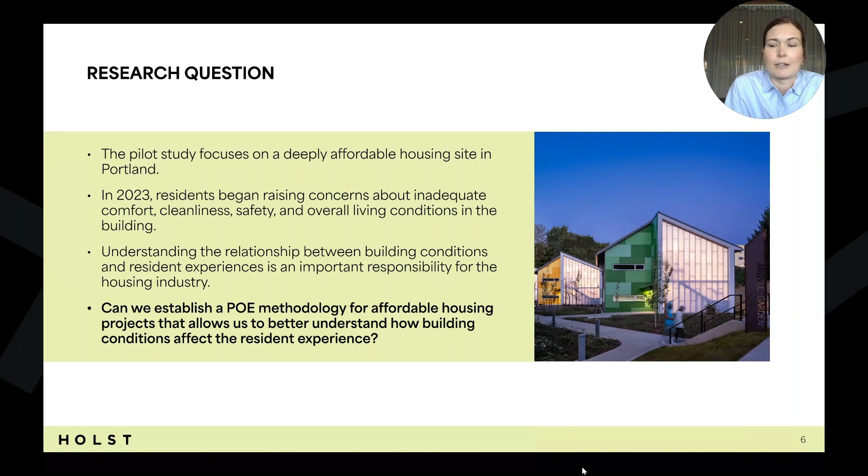Through this research design, we were able to take away key methods that could be scalable for future POEs and studies at other housing sites. Corey's going to talk a bit about the site that we studied.

The building overview: it's owned and operated by Transition Projects, which is a housing authority that is really trying to bring people up out of homelessness. A lot of their mission is geared around that, although they don't have very many properties that they operate — most of their programs are more administrative. Originally this was called LISA, the Low Income Single Adult Housing, because there's not really any family units in it. It's all single room occupant dwelling or sleeping units, and a number of studios, and there's one bedroom on site.

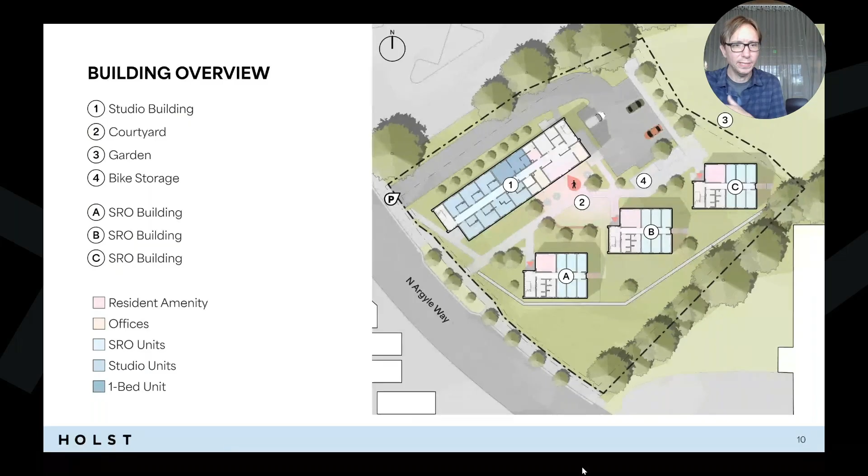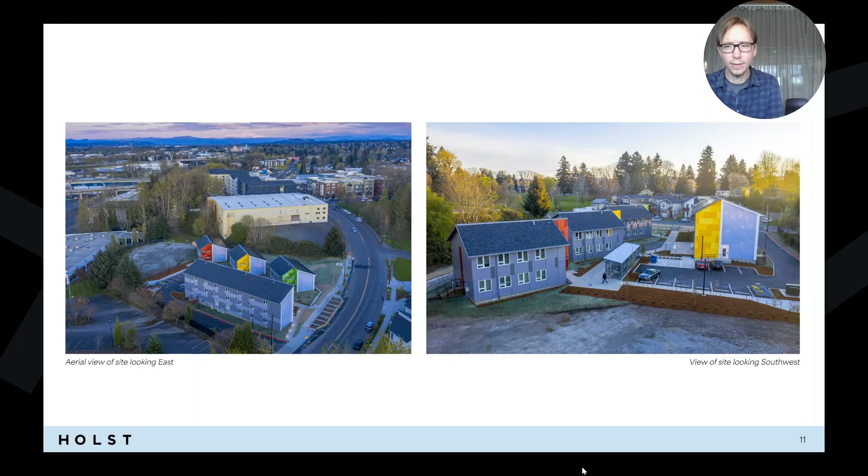Here you can see some photographs, one on the left looking towards the downtown Kenton area, and the one on the right from the back looking towards the street and Kenton Park. You can see here on the right the parking, which is rather limited, and Maggie will discuss some issues with that in a bit.

Diving a little closer in, looking more closely at the buildings, this is the plan of the studio building, and on the bottom is the ground floor plan. The pink is common spaces, like a community room and community kitchen. Items 3 and 4 are laundry spaces and a resident pantry. This is permanent supportive housing, so they have some materials and supplies available for residents should they need them. The blue is all the studios and the 1 bedrooms.

I've added an indication of how the building was constructed. It's modularly constructed, and the way it lays out for this building is shown here, where there are 4 modules per floor, 3 floors overall, and then the stairways and corridors were constructed on site between the modules once those are set in place.

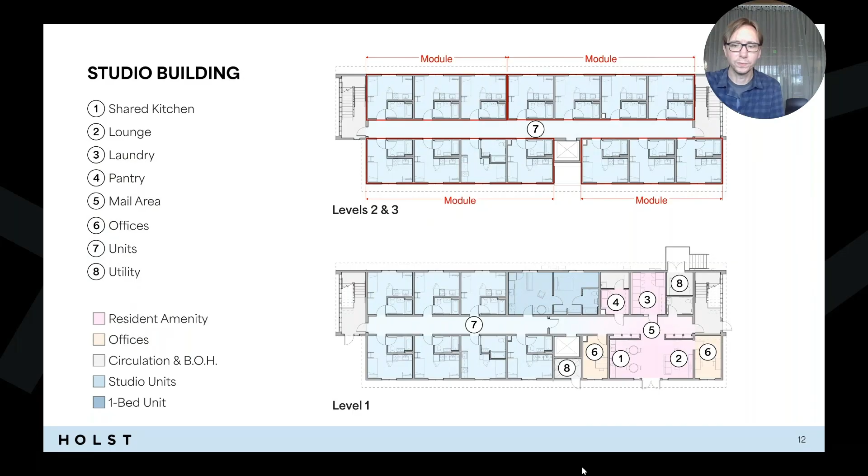These SRO buildings, of which there are 3, are all identical, and each one is 2 floors tall, with identical floors. Each floor has 6 SROs, 1 shared kitchen, and a pair of shared bathrooms.

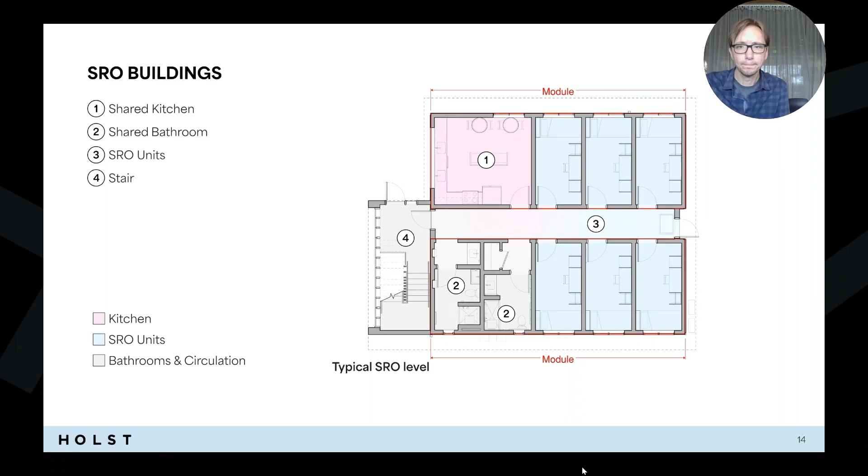Great, all right, so a bit about our research design and methods. Our overall process is outlined here. We like to think of it as 5 steps, and the first is planning.

For this case study, it was a bit unique because we identified the project we were hoping to study for this particular grant. Ideally, it's a partnership and a joint decision between the developer, building owner, and the architect or the group doing the POE. This helps identify clear goals or objectives for the study to narrow the research design focus.

The second phase is data collection. Since we had the site established, we established some criteria around what type of data we wanted to collect. We used a mixed methods approach for this, which is a mix between qualitative data and quantitative data.

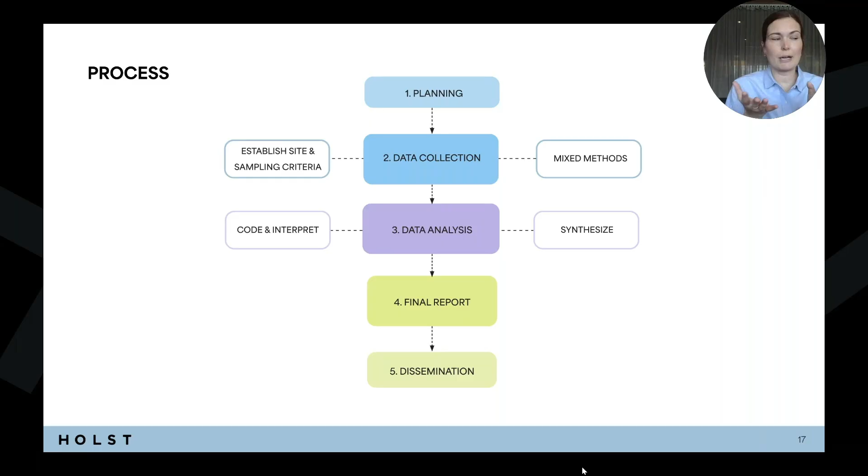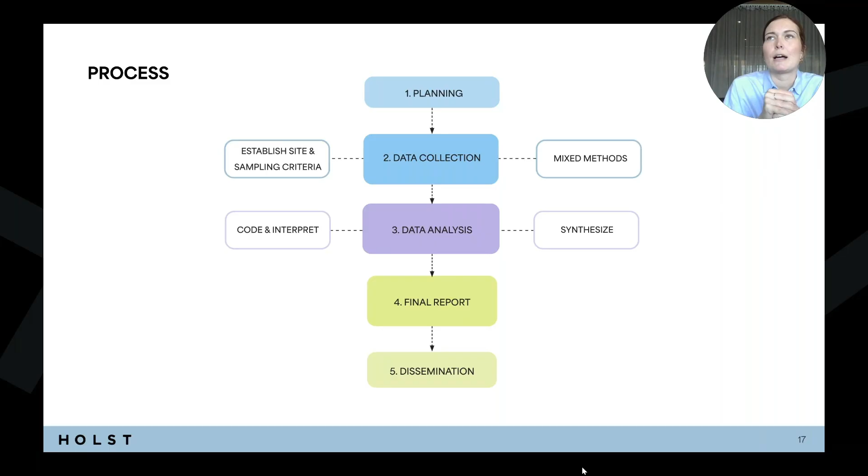We should also note that Holst was the architect of record for this project, although Corey and myself did not personally work on the project. It's important to be transparent with all of our findings, whether they're negative or positive. That is how we learn from POEs.

All right, so we kicked off the study with a building operator workshop, and this is what we recommend to be the first step for any POE. It's a way to meet with the resident services coordinators or the on-site staff, and ideally the property management team, to understand their perspective of the building and provide an overview and perhaps a glimpse into some areas specifically that we should study.

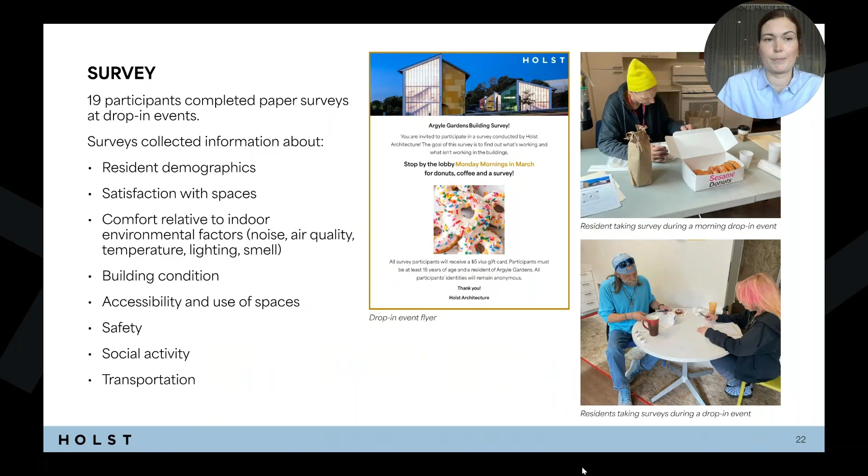The focus group was conducted after the surveys, and we find it's best to conduct the events in this order because a focus group can help elaborate on some of the key themes that we found in the survey responses, but also explain different anomalies in the data that we found.

This took place at the end of the summer. We hosted a barbecue, and we opened it up for all residents, whether they opted to participate in the focus group or not. Advice we received from our resident services staff is that when you're coming into people's homes and taking up their time, you want to make sure you're rewarding them and acknowledging that you're taking up their time and coming into their space. That's why we thought it was important to offer a barbecue for everyone, whether they sat in on the focus group following the barbecue or not.

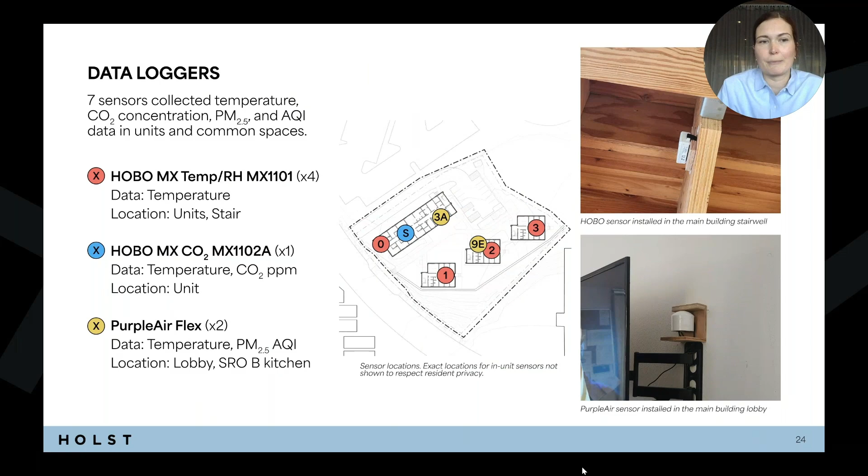We also did energy use modeling using the monthly electrical and natural gas bills. We were able to model some other scenarios to test different heating, cooling, and ventilation strategies.

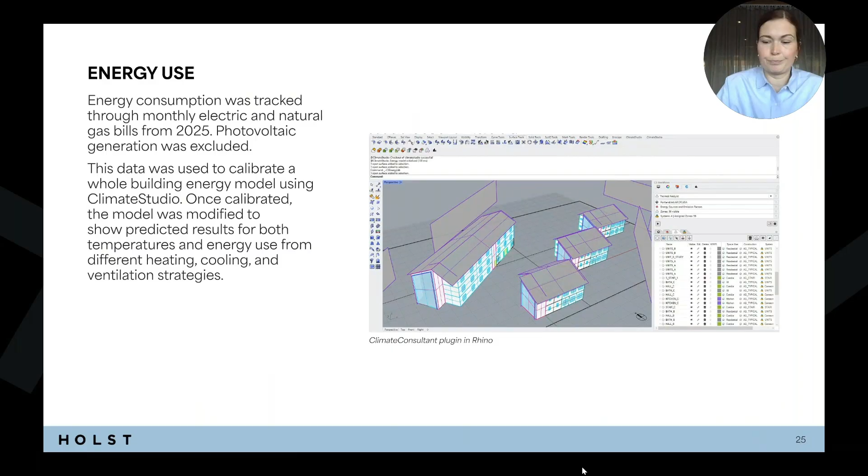For the analysis portion, in the building operator workshop, we always walk away from our conversations with resident services staff surprised, but also pleased with how invested they are in the overall health and well-being of the residents.

There's frustration about the amount of time it took for maintenance concerns to be addressed, and also some structural issues that residents were up against where they felt their hands were tied and couldn't quite do anything about it. Other than those concerns, there was a sentiment echoed throughout our study that the sense of community was very strong on site, both between the residents themselves and between the staff and the residents.

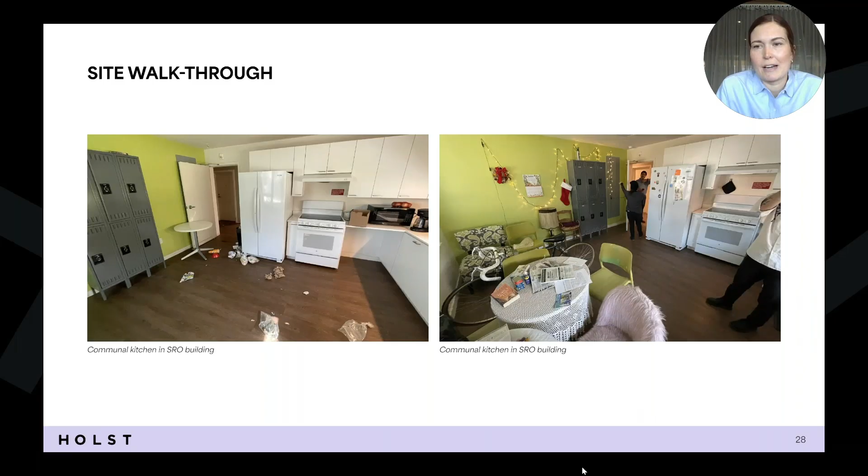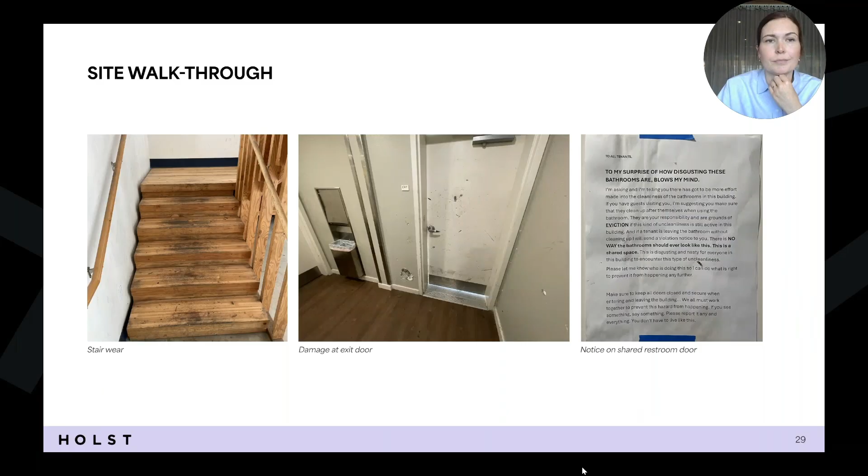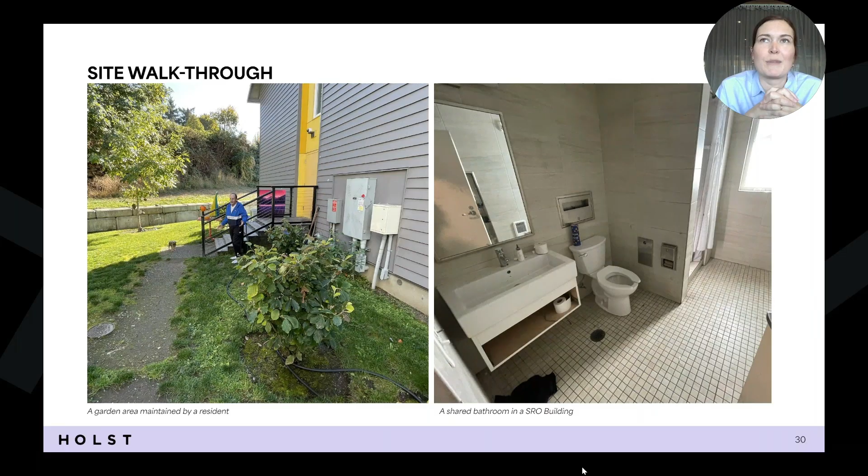Then we dive into specific spaces and resident satisfaction within those spaces. Overall, a lot of the residents said the spaces are okay. One area we wanted to note, though, was the parking area, where no one actually ranked it the best, and many residents ranked it the worst. Going into the study, we had thought there's some frustration around the parking area because of limited spaces. It turns out residents are able to find ample street parking, or they don't have a vehicle, so that's not the issue. The issue is there's not enough turnaround space for emergency vehicles, which frequent the site.

That was eye-opening to hear.

In terms of comfort, specifically the sound, overall, no major concerns. Only a couple folks rated sound the worst, but we found that there's a lot of sound complaints from unit to unit or from the hallway to units, so the sound or noise created by other residents.

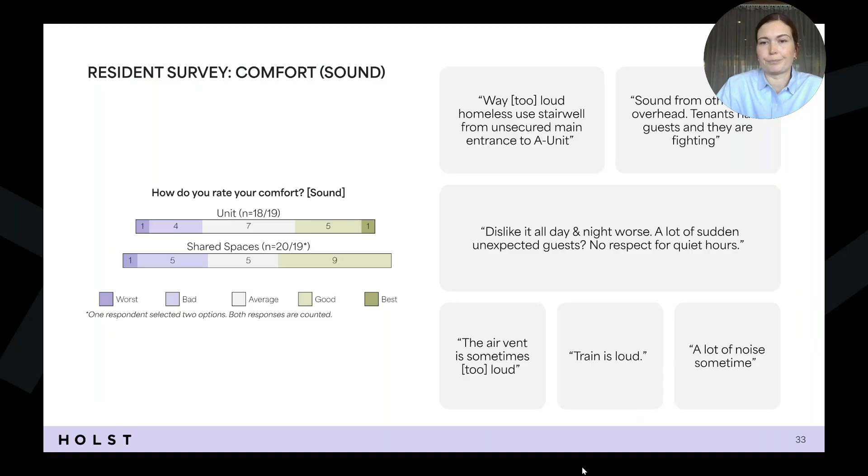In terms of feedback about air quality, we hear a lot that there's extreme dust levels, and this isn't the first property where we've heard that, so concerns from residents consistently about that.

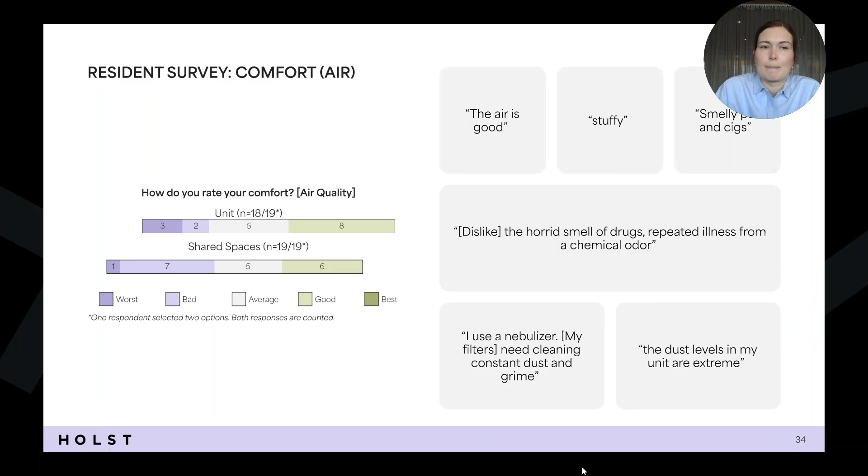In terms of the feedback about temperature, there was a discovery about extreme temperatures in one of the stairwells, which Corey will get into in a bit. But overall, there were concerns about not having AC in units. And we've heard this again echoed in other POEs where resident services coordinators will request that residents actually open up their unit doors on really hot days to make sure everybody is okay, because the temperatures are now getting so extreme.

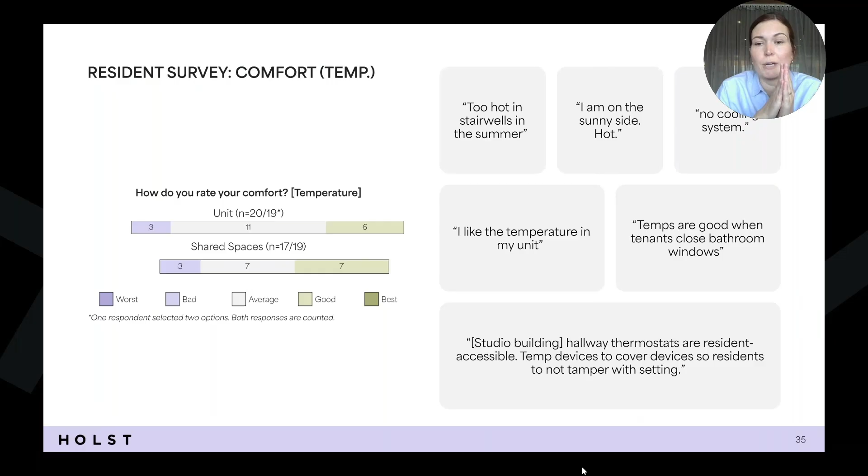In terms of the spaces and overall use of the spaces, the majority of residents use the primary lobby or community room the most. This is in the studio building that Corey pointed out earlier. It's a fairly small space, and it opens up into a patio, a courtyard area that is also used. Every time we were on site, there were at least 5 to 10 or more residents gathered around chatting or watching a movie or having coffee.

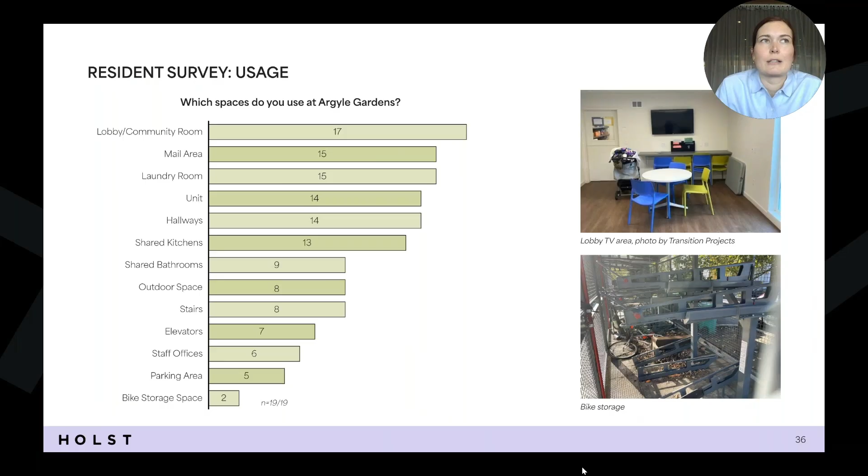The space that is used the least is the bike storage space, which you can see in that bottom photo there. There's an outdoor bike storage structure that I believe just has one bike in there. And we found that a lot of times residents who have bikes actually like to store them in their units because of their value.

In terms of safety, this one was interesting to us because this is what we had heard a fair amount about through articles that we had read about the site prior to the study. We did hear some comments about safety concerns, but not necessarily between residents, but from people coming onto the property. So there was security implemented on site that helped residents' perception of feeling safe. But then we also thought it was interesting that when residents had to rank the individual areas in terms of feeling unsafe or safe, the majority ranked them as feeling safe. So questions like these, where you get a mixed result in the responses, are a great theme to take back into the focus group to understand it better.

In terms of social connection, the connection with other groups on site, mostly folks said they'll socialize sometimes, although they did note in their open-ended questions the importance of the resident services staff on site. There's a quote there about one of the resident services coordinators, and we just hear over and over again how important they are to the resident experience.

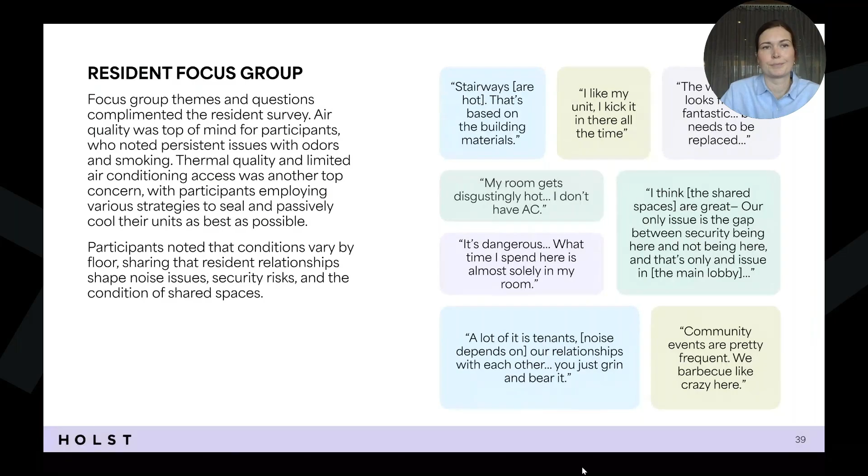Okay, so to get to the quantitative data that we took via the sensors that Maggie mentioned earlier, I'll explain how all these charts work the same way, where the blue dashed line is the ambient outdoor temperature or air quality. You can see here that we began our data collection in the beginning of February and ended it essentially the beginning of October. So you're seeing not quite a full year, something over the course of the summer and into the beginning of fall, so you can see in the outdoor air temperature that hump for the summer where it gets warmer.

The coldest daily average and the coldest instance of the year was on Valentine's Day. The hottest was August 11th, and the 12th was quite hot as well. So that's sort of the outdoor ambient data.

The colored line is the daily average temperature or air quality, and the shaded region on either side of it is the range, so the highs and lows within that individual day.

So you can see here for one of the SRO units in Building A, I believe on the ground floor, the temperature over the course of the year was rather flat. I believe this person had a portable air conditioner that they used during the summer, which helped keep the interior temperatures at a reasonable level.

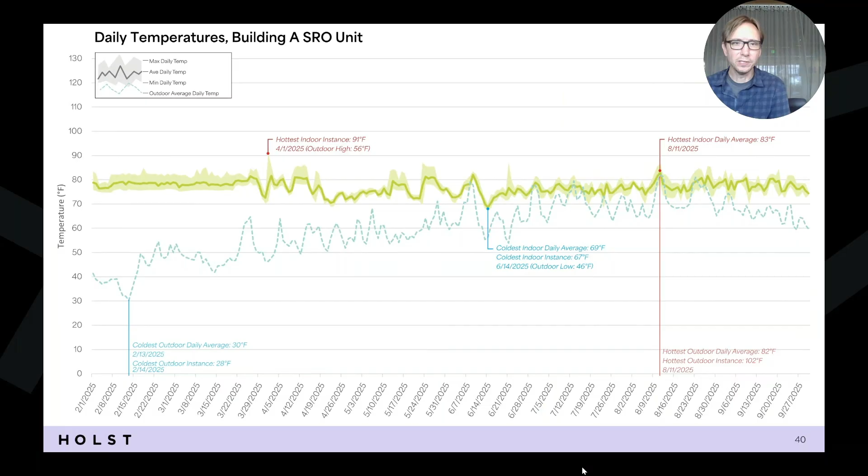For one of those SRO units in Building C, this person stated that they use their air conditioner, quote, all the time. So you can see their temperatures are a little cooler. They did have a couple of spikes in the spring, I'm guessing a particularly sunny day. I don't know if there's more to say about that, but their temperature is reasonably cool in this unit.

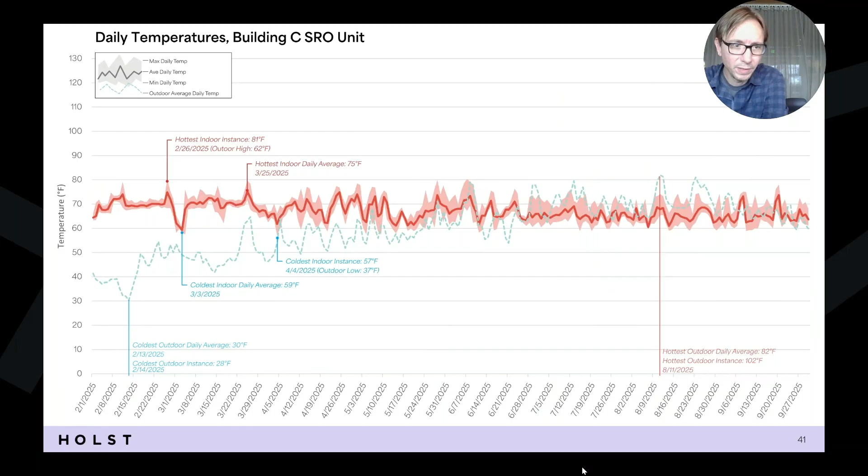Studio unit, I think this one was on the second floor of the studio building. This one did not have a portable air conditioner, and you can see the corresponding temperatures kind of tracking with the outdoor temperatures over the course of the year.

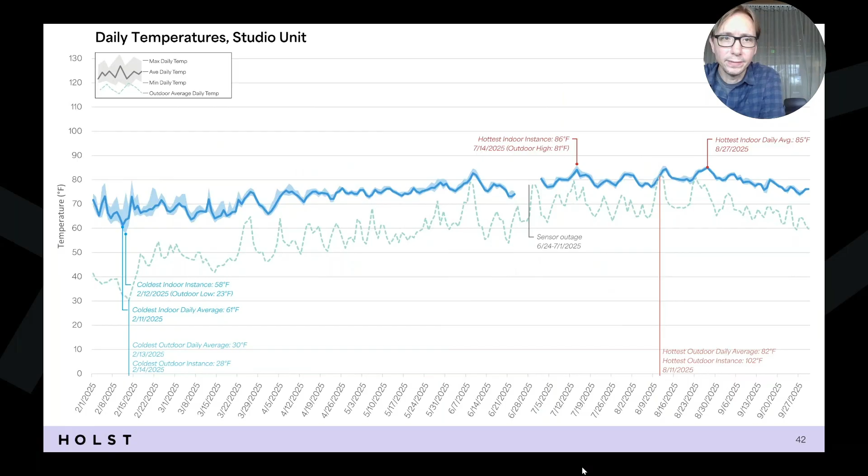Including a daily average of 85 degrees, or a hottest instance of 86 degrees during the summer, so quite warm - which is something we found to be pretty typical amongst affordable housing projects we've worked on in the past without air conditioning. Some of the units, particularly those on upper floors or with a lot of solar exposure, get quite hot. So nothing terribly out of the ordinary there, although it can be uncomfortable.

So this is one of the shared kitchens in one of the SRO buildings. This was rather surprising - there is cooling in the corridors, although not in the units. The mechanical system in the kitchen is essentially just exhaust only as well.

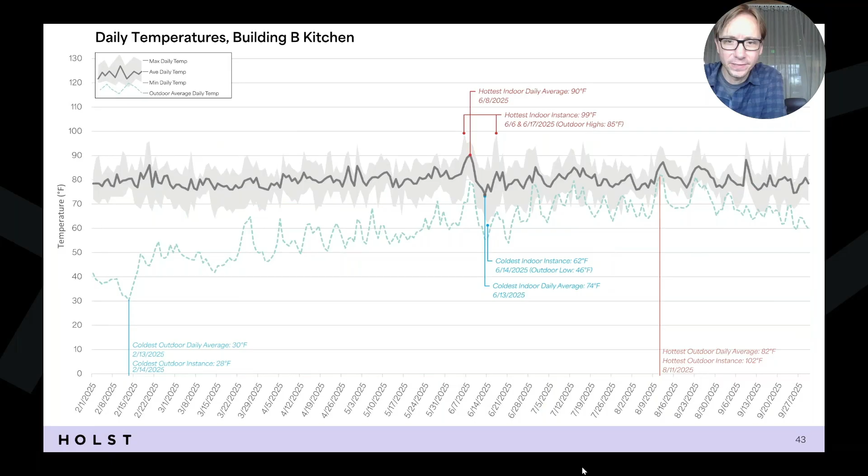But this room gets rather hot. It stays rather hot pretty much all year. Although when I was there, it doesn't feel as hot as the temperature indicates. I don't know if it's a mean radiant temperature thing, but the sensor is indicating that it's quite warm over the course of the year.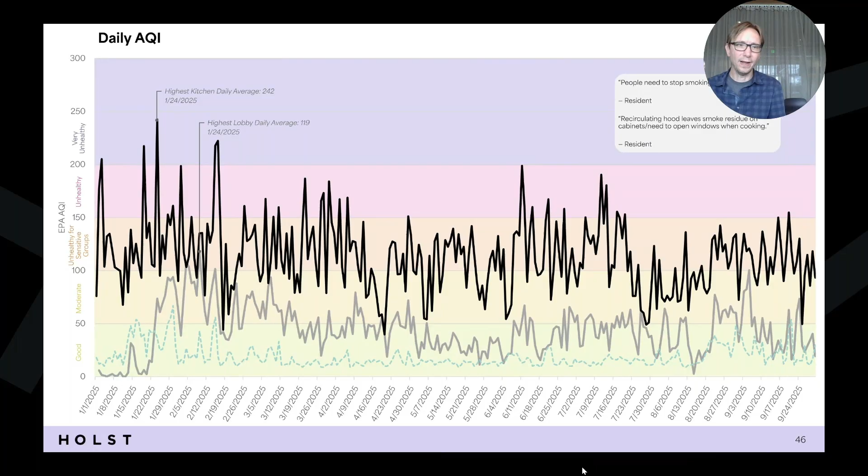There is a lot of use of air fresheners in and around the property to kind of mask odors, and I think the air quality sensor is picking a lot of that up. Essentially those odors are particulates in the air that are intended to smell good, but it does indicate unhealthy air quality when a machine is sensing it.

Another thing we did was place a CO2 sensor in one of the units. This is that studio second floor unit that we had the temperature readings for. In this case, we're using CO2 as sort of a proxy to determine how effective the exhaust-only ventilation system is in terms of keeping the CO2 levels manageable.

On this scale, the typical outdoor range is in the 400s, sometimes ranging up to 600, which you can see between the dashed lines at the bottom. The recommended maximum values for interior air CO2 kind of depend on who you ask, but one rule of thumb is to try to keep it below 1,000 parts per million. ASHRAE actually has a recommendation of keeping it no more than 700 ppm above the ambient outdoor air quality. So you can kind of see those ranges here.

Generally, this unit stayed within the recommended ranges. There were a few peaks, which could be a lot of things - it could be guests that overwhelmed the exhaust system's capability of exhausting the air fast enough. Also, you'll notice that at one peak in April, it kind of stayed high after that, and we're not exactly sure why, although it's been speculated perhaps that person got a pet or something, and the extra respiration in the unit might be causing slightly elevated levels. But generally it's staying below - the daily average is almost always below the recommended levels, so that was good to see.

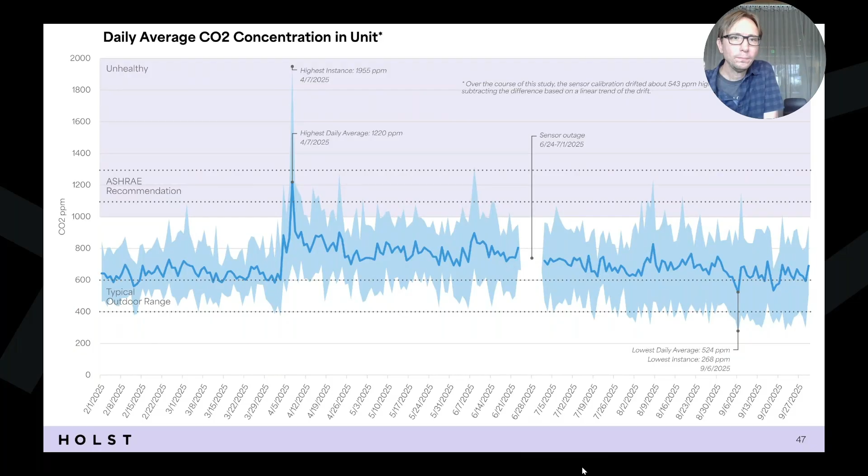The other thing that we did was an energy model, and this was sort of a multi-step process. Because we had actual verified energy bills from 2022 from a prior study, and then we collected them again for 2025, I was able to use Climate Studio, which is a plugin to Rhino, to model the property, essentially do an as-built of that, compare it to the actual energy use, and then fine-tune that model to try to match the observed results as closely as possible. The out-of-the-box model assumes certain things for occupancy and about the way the building is being used, and I was able to try to tweak that to match what we observed as closely as possible.

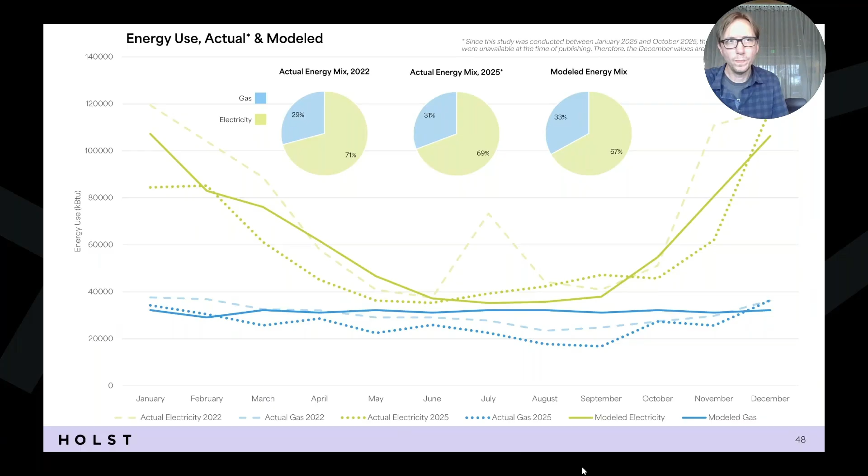There are anomalous results - like in 2022, there's a huge spike in electrical use in July. I'm not sure why that was; there's no data to indicate why that might be. But generally, we were able to fine-tune that model to produce results within about 2% of the actual observed results.

So what are those results? At the top here, you can see the baseline expected EUI, and EUI is effectively just like a miles per gallon for a building - a way to compare apples to apples between building types. Housing baselines for this usage are around 60. What we observed, in the yellow there, is somewhat below that at 52.2, which was encouraging to see, since it's below what would be expected for a building of this vintage and occupancy level - so it's performing well. The modeled energy use in purple there was my attempt to match that as closely as possible, and I got it to 51.2.

One thing we were curious about, outside the range of a normal POE, and because we were the design architect interested in finding out how the building could be improved, we speculated: there's complaints about cooling in the summer, the building being uncomfortable when it's hot outside. What if we were to augment the building with mini split air conditioners? The result would be enhanced comfort in the summer, but slightly more energy use.

The mini splits would take the place of the electric resistance heat and provide cooling in the summer. So energy use increases in summer but decreases in winter, because the mini splits are much more efficient at heating than the electric resistance heaters. Overall, pretty net even on energy, but better comfort over the course of the year.

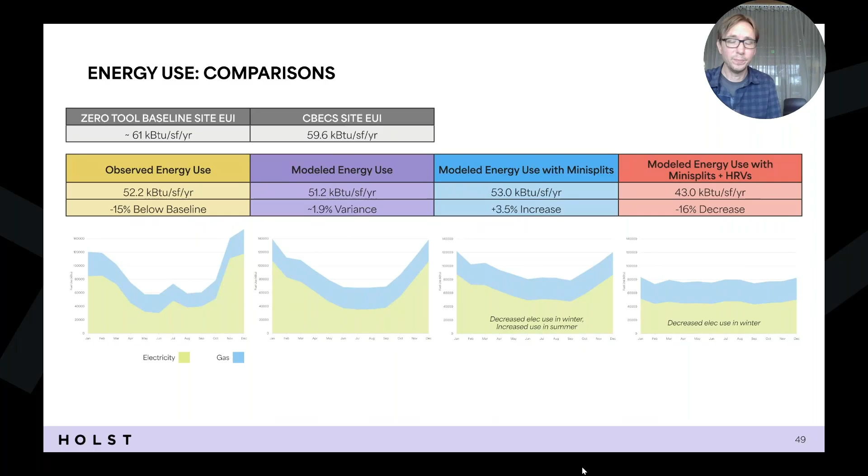To address the stair, one thing we were thinking about was that there's essentially a big solar heat gain factory there. What if we tried to shield that from the sun with a couple of different shading schemes for that window? Also, we looked at what happens if we air condition it.

In the yellow upper left is the baseline, and what the energy model predicts that temperature to be, which is well over 100 degrees. If we try different shading schemes, it does help a little bit with the overall heat gain, but not terribly—it's still quite warm in there. So the next step would be: what if we added cooling? The lower left there is no shading, adding cooling. Instead of the 3.5 EUI baseline, which is essentially just lights and that fan, the energy use of that space increases dramatically, but the temperatures get under control.

If you combine the most successful shading strategy with that cooling, the temperatures are even better and the energy use decreases. Nothing surprising, but it's rather interesting to explore the possibilities of what could happen there. We're working on a solution to help mitigate those temperatures, but these were interesting experiments along that process.

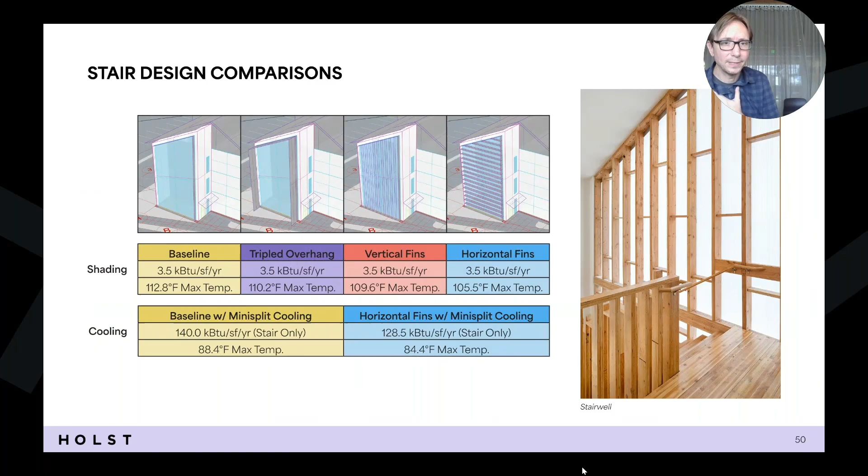All right, I hope you all are doing okay. A lot of data there that we shared, but we just wanted to summarize our key findings through both the qualitative and quantitative data. First, through our coding of the qualitative data, we identified four key themes—the subjects that came up the most in the survey and focus group: comfort, safety, maintenance, and social connection.

For comfort, as we just discussed, there's concern about high summer temperatures and the lack of AC in units. We heard that from both the resident services staff and the residents themselves. As mentioned, there's also a fair amount of internal noise concerns, it seems like more from noisier tenants and fellow residents. And then there's air quality and odor concerns—some concerns about the air freshener smell that Corey noted, and also some pet odors on site.

For safety concerns, trespassing and break-ins were the primary concern. We've tried to confront these challenges by bringing on the hardware consultant earlier and really looking at different hardware that is more tamper-proof, because we've heard that from not just this site but other sites as well. There's also a concern with the single stair egress in the SRO buildings—hearing this feedback challenges us in terms of thinking that what may be allowed per code might not be the best in terms of a resident experience.

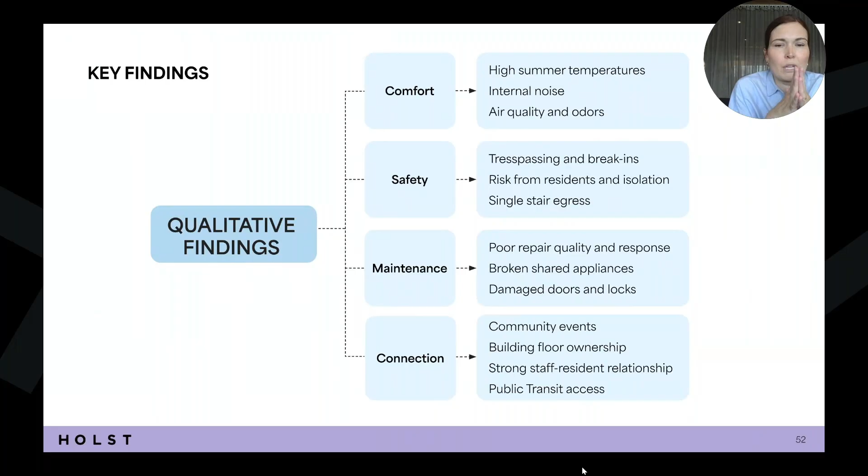And then there's public transit access as well. We heard a lot from residents about their trip time in order to go to a grocery store, go to their doctor's appointments, or go to work. It's important to hear these perspectives to really understand the residents and their daily experiences.

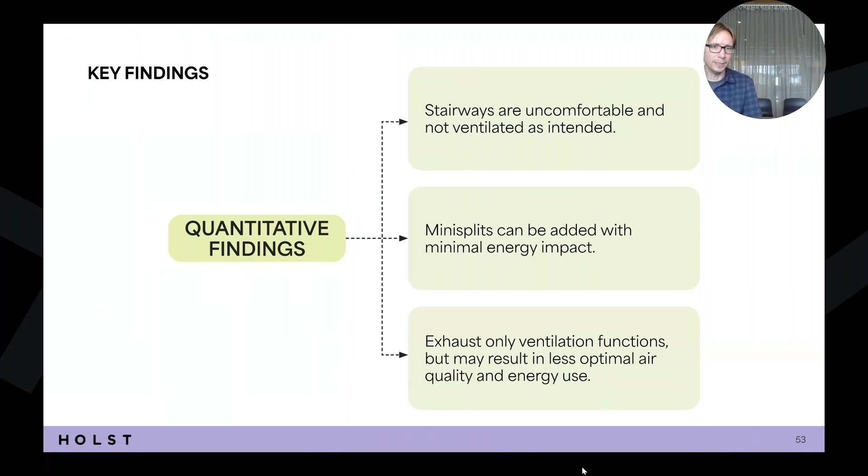I will note that the importance with this POE Lite is that the resident services staff are willing to help out as liaisons. I've mentioned this quite a few times now that they are so important as a liaison working with the residents. Also, if you feel as an architect or someone who isn't trained in research, you can always ask one of the case managers or resident services coordinators to facilitate the focus group for you, and they can ensure you avoid any questions that might be triggering or sensitive to the resident population.

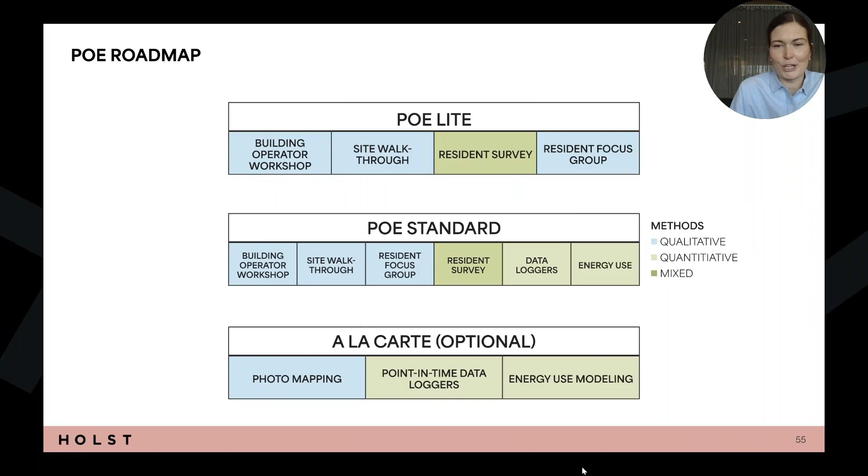So with that, we'll hopefully be presenting this at conferences, both locally and nationally. We'll be sharing the report and the framework document online for everyone to use as a resource. Our goal in this is really to share our findings, whether those are positive or negative—the point of a POE is to challenge ourselves as designers and architects, and also partner with the larger affordable housing and development community to improve the status quo design process.